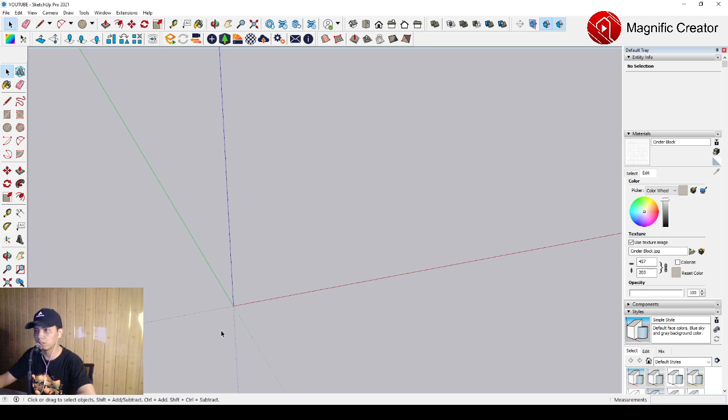Okay, in this video I'm going to explain to all of you about how to make a wall shelf on a curved wall. First of all, we have to make a 2-point arc over there, so then we can set the

length about the arc with any size. Anyway, we can just press on this. Okay, so then we can select it and we can offset it outside, maybe around

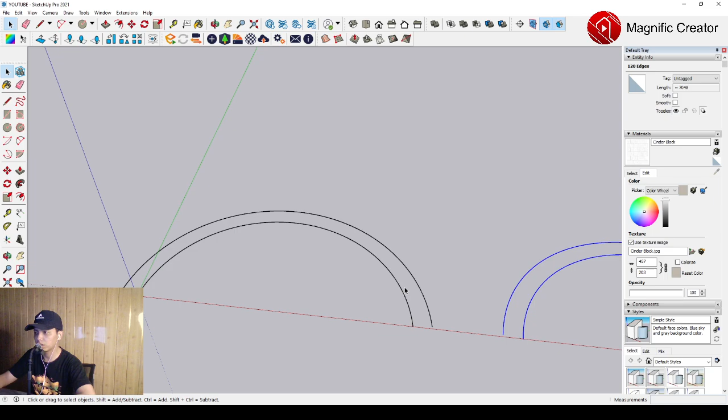150 millimeters. So we can move it and duplicate it first, and then we can close the unfinished plane, so you can see this. And then we can push it up around 3 meters.

Okay, and it's done anyway, and we can select it and offset it inside, around 350 millimeters.

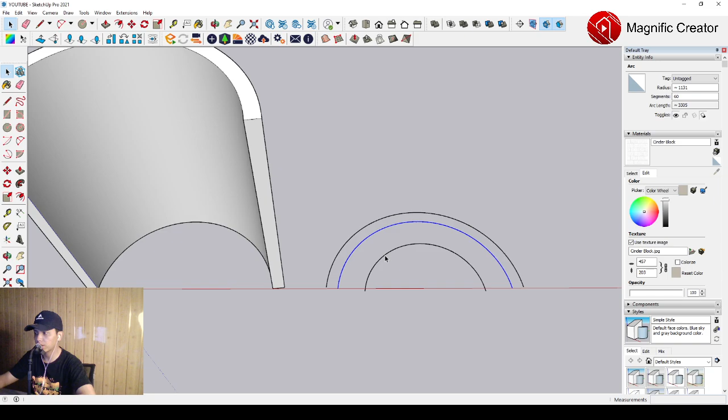Okay, so we can make the finish line over there just like this, and then we can select it and move it. Then we can place it on the center position of this wall anyway.

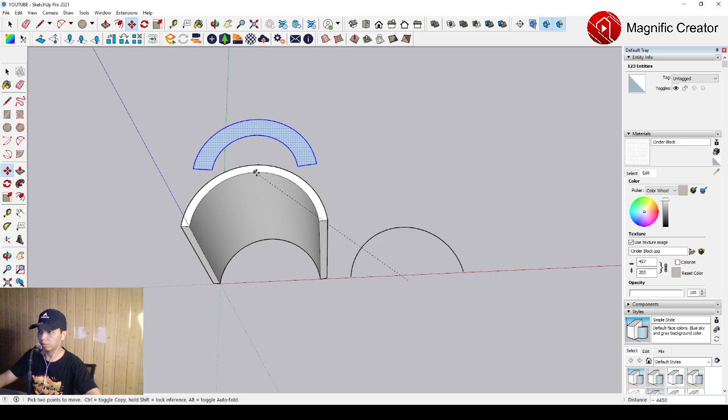We can select and make sure that it will appear on the center line of the curve. Okay, this is the center position.

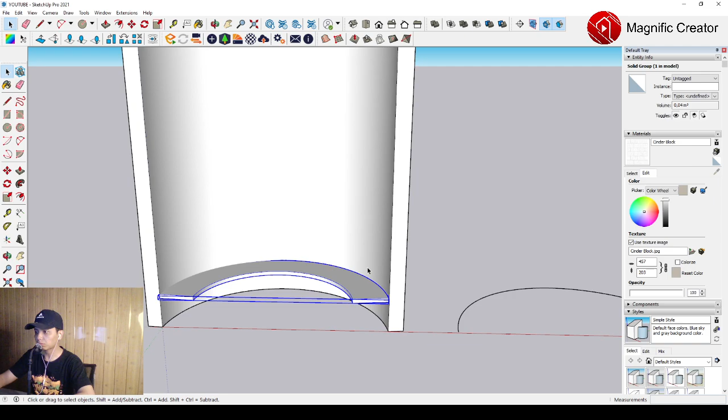And then we can push it up a little bit, around 40 maybe, and just make it a group. And then we can move it to the upper position.

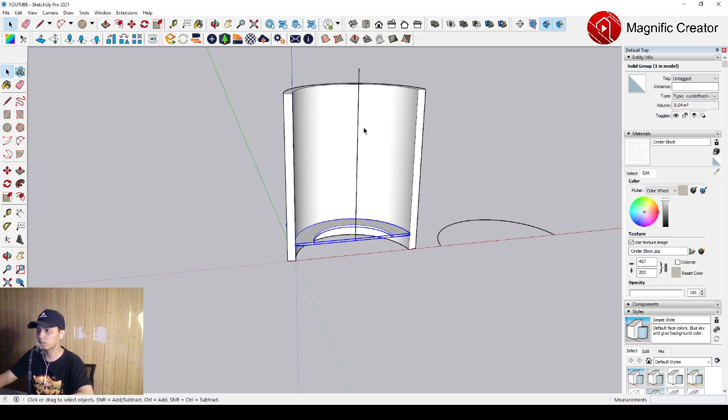Sorry, it seems a little bit off there, so we have to make the line vertical first. Okay, then we can make it a group.

And then we can move it just a little for temporary, so then we can make the line vertical there also. And then we can place this center line to the center position of this wall anyway.

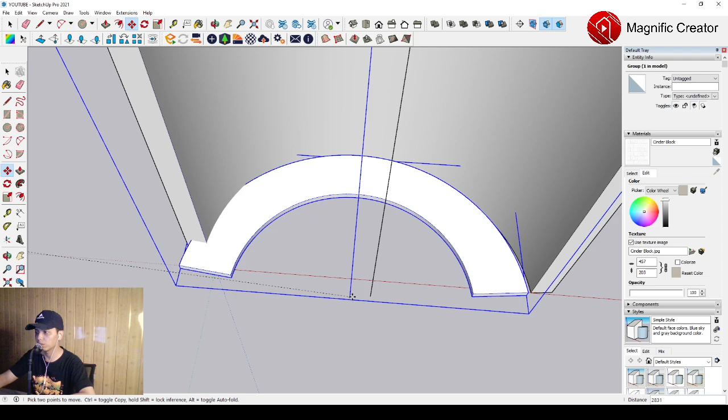Okay, it looks perfect compared to before. And after that, we can move and duplicate it to the upper position, so we can place it here, and maybe we can just place it on this position.

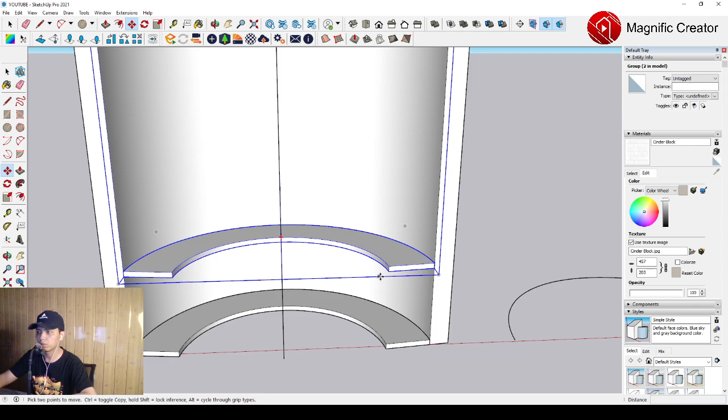And then we can select it and move it. We can move and duplicate it to another position, then we can type x3 for example, and it's done.

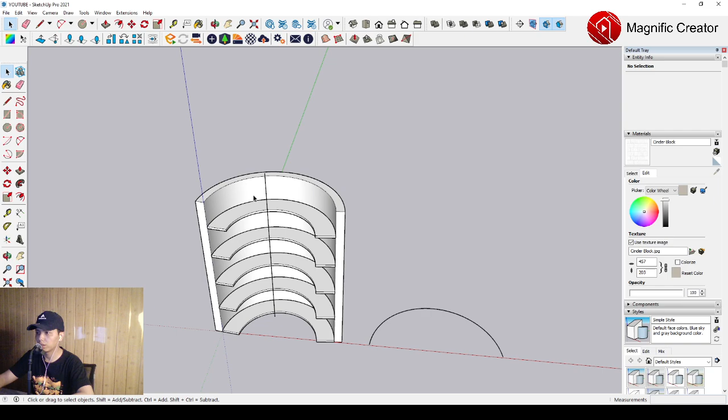And then anyway we can delete it. We can delete every single line that we don't need.

So we can make the wall surface cinder block over there, and then we can make the wood material, maybe we can use a synthetic surface just like this. We can use synthetic surface.

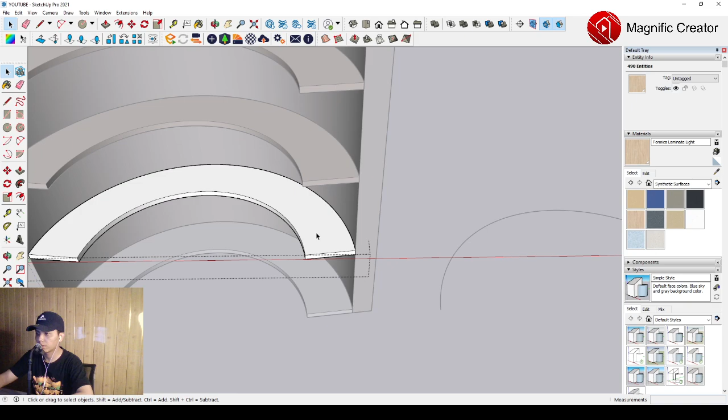Okay, just like this, and you can see about it. You can delete some unnecessary lines, and it's done. And this is about the curved shelf on the curved wall.

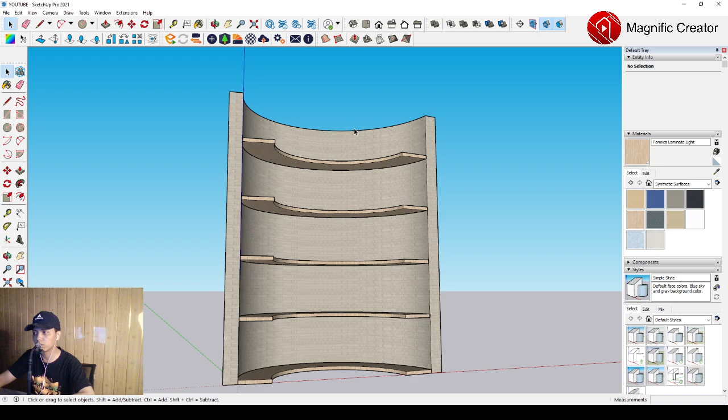Okay, I hope it will be a lot of benefit to all of you. That's about the beginner tutorial or basic tutorial, so you could improve more about how to make other furniture or other objects, and wait for my next video. Thank you.